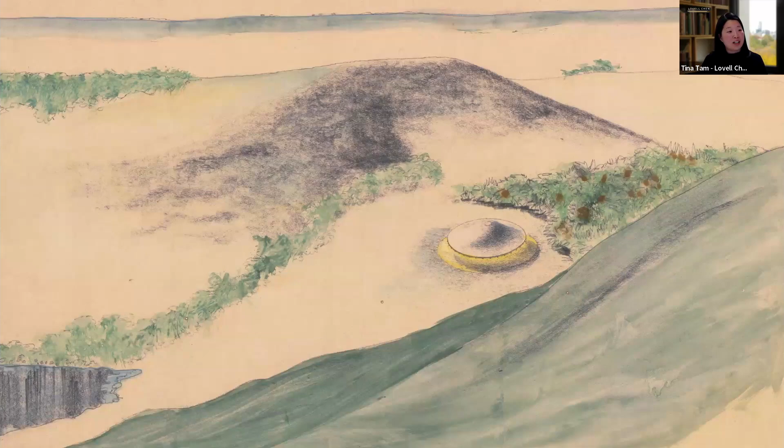So in our research with the conservation management plan, and through archives and information provided by the Robin Boyd expert panel, we had quite a lot of information to draw from in our design, which was really great. This is one of Robin Boyd's early concept sketches for the visitor centre, which show the building envisaged as a pure circular form with a roof that emulates the volcanic cones of the area.

The interior space was a continuous open volume for exhibitions, with a central model space at the heart to hold the terrain model of the reserve. At one point during the design, the requirement for supporting program, such as toilets and storage, sectioned off.

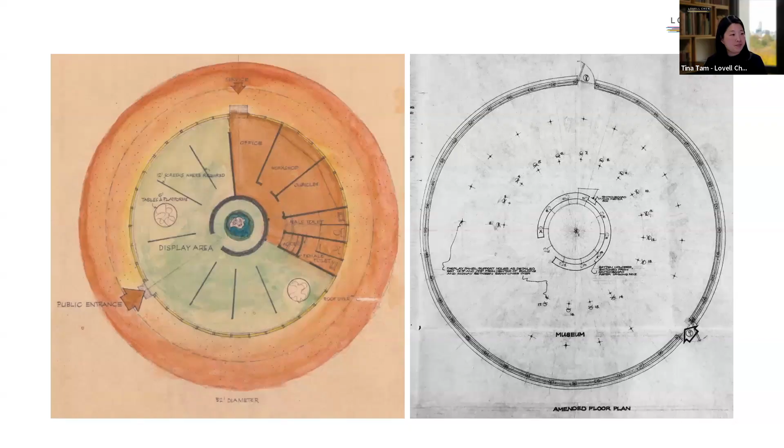Based on discussions with Robin Boyd, the amenities block was designed as a blank monolithic form by the Public Works Department and located at the periphery of the visitor centre. The two buildings were linked with a common construction material of local limestone sourced from the area.

So for the past decade before we started, the visitor centre has been a shop and a cafe, and the small ranger's office in the amenities block converted into a classroom. Our brief was to provide a base for EMAC for their return to being the stewards of the site, and they needed additional exhibition space and education space, which actually resulted in an overall increase in area that we didn't have.

The other challenge was that this brief conflicted with the funding agreement, which was originally based on demolition of the amenities block and its replacement with a standard toilet block and no buildings. And so this is where the support of the expert panel, Parks Victoria and EMAC became really important, because together we advocated for the retention and adaptation of the amenities block to continue its role as a supporting building in honour of the Public Works Department's initial gesture.

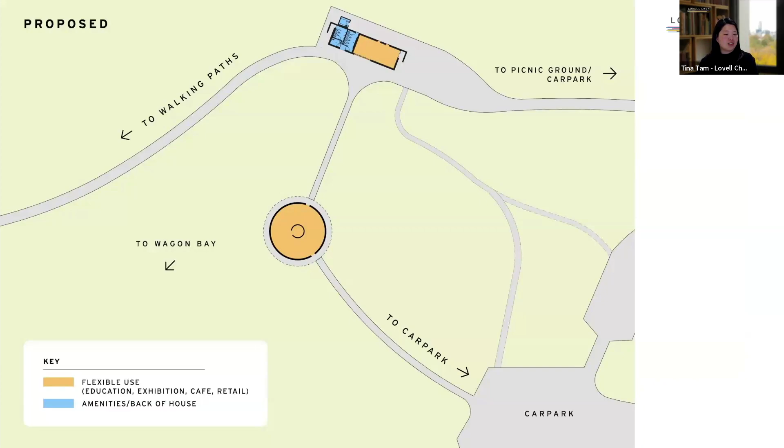And through a sleight of hand, the western side of the building was extended by 2 metres. The detailing of the new slot opening was discussed extensively with the builder and expert panel to make sure it was clear as an insertion and buildable with the soft, uneven limestone.

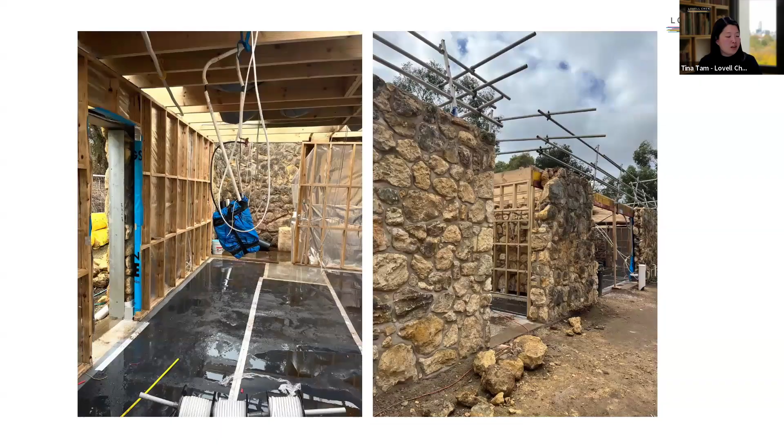We consolidated the bathrooms to one side and used every single millimetre, and this provided the additional space for learning on country. As part of the work, we also upgraded the building envelope with insulation to the walls and roof and new double glazed windows. And all stone from the internal walls was salvaged for reuse to the extension. So this is the completed extension and a before and after view from the visitor centre.

The next aspect of the project was really about the conservation. And in our restoration of the visitor centre, we're really acutely aware of our responsibility to maintain the clarity of this pure form, its innate connection to place and its patina of age. Our process was supported by rigorous research and effort and discussion with the expert panel. And in many instances, the decision to do nothing was a conscious one.

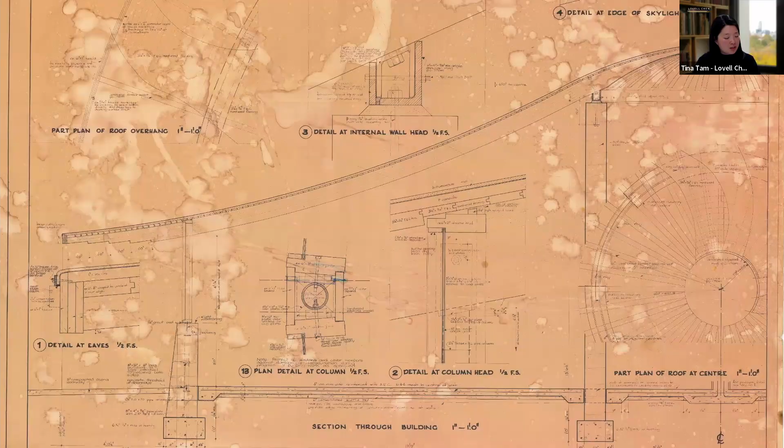The first step was to repair the roof. And our research, our access to the drawings helped us understand the composition of the roof with its spare construction of glulam beams, which is an emerging technology at the time, and timber lining boards as both ceiling lining and bracing. And these are some photos of the work being constructed and some excerpts of specifications that we found as well in the archives.

And to avoid damaging the brittle timber lining boards, we encapsulated the existing bituminous membrane with a new system. And following a prototyping process, we then cast in the scoria, ensuring it was like the original sourced from the place. And this is the result.

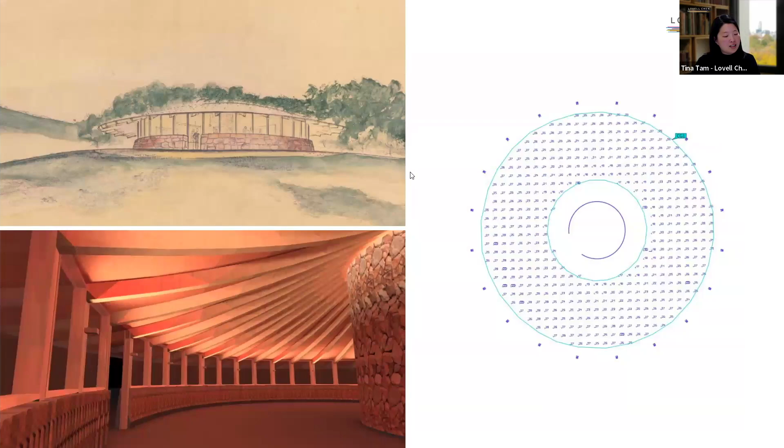The interior of the building has changed from its original honest representation of materials, as shown here, to a very different type of space. So our first move was to remove all of the fittings from the ceilings. We then developed a lighting scheme that uplit the ceiling in the spirit of Robin Boyd's original concept sketches. The lights are fixed to the outer columns and cabling threaded within the cavities.

We also stripped the paint from all of the glulam beams, ceiling linings and concrete floors using a non-toxic system to avoid runoff of polluted water into the environment. The slab was sealed with a penetrating sealer for protection while maintaining its patina. And we also tested the wiring within the floor boxes so that we could retain these and avoid cutting into the slab.

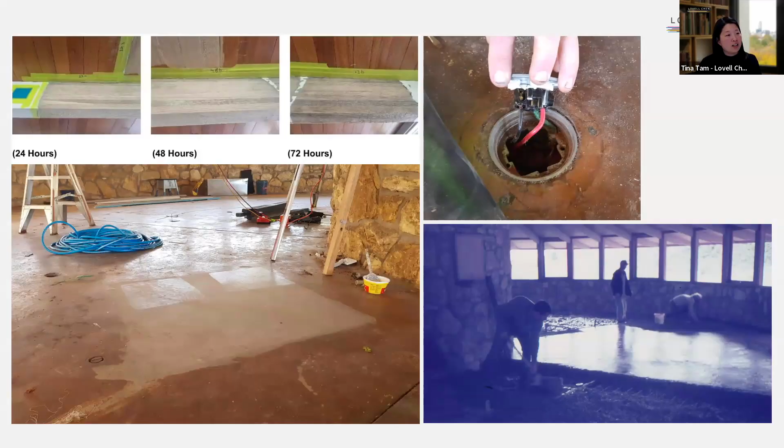We collected paint scrapes to understand the sequence of paint coatings. Interestingly, the discovery of a taupey green colour as the earliest coating conflicted with the specification written by Robin Boyd, which called up gloss white. And it seems like Robin Boyd had simply changed his mind along the way and used decking stain in the end.

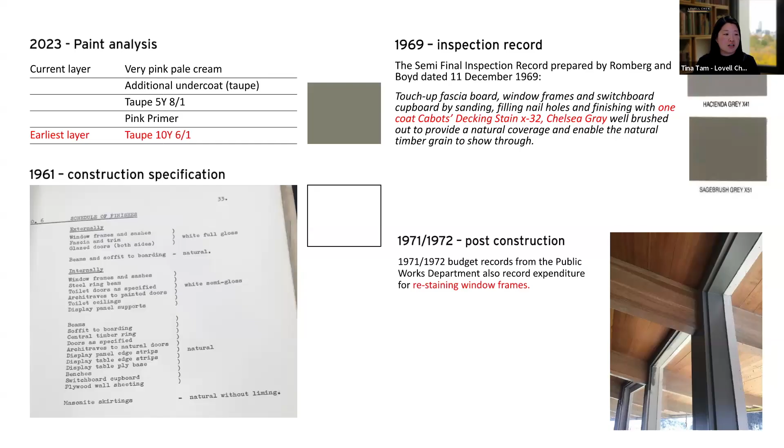So given the very condition of the timber work and the exposed environment, a decision was made to paint the timber in a colour similar to the decking stain, rather than reinstating the original finish, so we could hold on to as much material as we could. And there's some photos of the completed interior.

And the last aspect of this project is really about values and significance. Because of all of the stories that we learned along the way, it was really an important exercise for us to rethink how we assess significance. Without the protection of an individual heritage listing, the amenities block was originally slated for demolition. However, we demonstrated the value of this building based on its relationship as a support building to the visitor centre, its embodiment of community support, its suitability as a base for EMAC, and its embodied energy.

With the structure comprising 77% of the building's embodied energy, the retention of the amenities block is a demonstration that reuse of buildings, whether heritage listed or not, should be the first point of call and an urgent solution to climate change. And the last point is the project's central tenet of reinforcing EMAC's presence on country. The eel trap is significant for EMAC as their source of food and identity. We needed to find a meaningful place for this gesture.

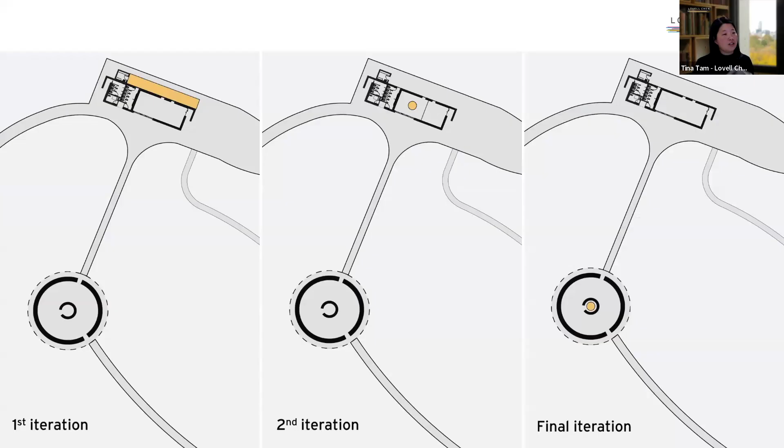Throughout the design process, the eel trap was proposed in various locations, but finally settled in the central model space of the visitor centre, which is the symbolic part of the place. We've given this space over to the eel trap to acknowledge change and EMAC's continued presence on site. And the eel trap has been commissioned and it's being made by an Aboriginal artist.

So to conclude, in our role as architect, conservation specialist and historian, we have honoured the various groups that have cared for this place. And we really think that the consensus has created an infinitely richer outcome.

Thank you, Tina. And then I will just jump straight into the Philip Smith Centre. Yes, please. This one's a bit shorter. So the Philip Smith Centre is located on a campus called the Domain campus just outside the CBD of Hobart. And again, in our role here, we were the heritage consultant as well as the architect.

So the Philip Smith Centre is located on the Domain campus, as I just said. The Domain campus is important because it's the founding campus of UTAS. And the building itself was designed by the Public Works Department and remodeled by Rudolf Koch and constructed in 1909 and 1910. And there were probably just a few things I wanted to talk about with our design process today. The first thing was really our intent to capture the building's spirit.

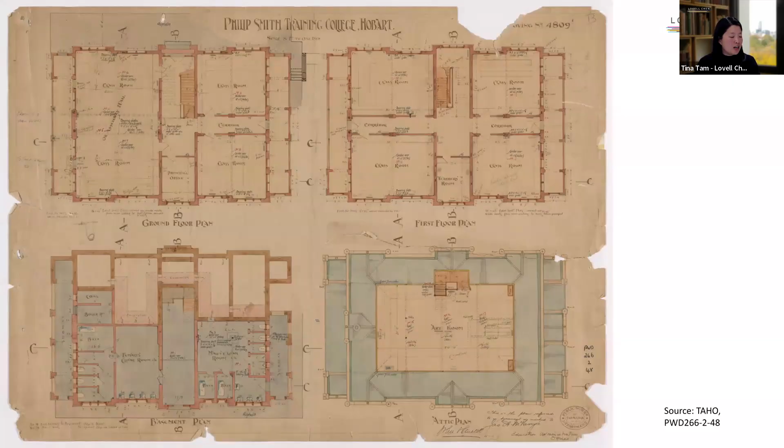The building was designed to progressivist principles, and this was grounded in a belief that education should stimulate psychological and social well-being in students, and it promoted a hands-on or experiential approach to learning. This was translated into a very clear plan of generous teaching spaces with large windows for natural light, large double height verandas on each end, providing fresh air. The interior scheme had minimal ornament with dust-resistant finishes such as painted hard plaster and pressed metal ceilings.

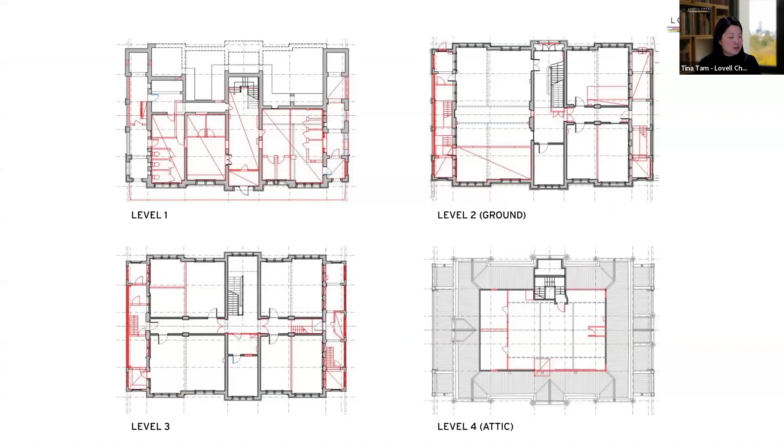So our first step was to peel back the later interventions to restore the progressivist design principles of well-being, fresh air, and natural light. The original plan of the classrooms was restored to provide teaching spaces, and the art room in the attic adapted to provide an office or teaching space, self-sufficient with its own amenities. The later infills to the verandas were also removed to provide breakout spaces.

And these are some of the before and after photos. This is before and after. Before up in the attic and after.

The second part of our approach for this project was designing with nuance and avoiding harm. We consider the most important part of our design to be what we didn't build here. And that was important for reducing the carbon, the embodied carbon, but also for minimizing harm to the building. The requirements to bring buildings up to compliance with current code can be extremely invasive, risking damage to the fabric and loss of architectural intent. So together with our team of engineers, we undertook a detailed audit of the existing condition that ultimately supported the retention of the existing structures and services.

To reduce the operational energy, we started with a fabric-first approach. This building is unique for its large windows and still had interiors which were very intact. The condition limited our ability to retrofit insulation externally, internally, or within the brick walls. Instead, we targeted the areas where works were already occurring. We upgraded the roof with additional insulation, airtightness sealing, and replaced the damaged clerestory windows with new high-performance versions. And as part of the refurbishment of the double-hung windows, we installed draft seals.

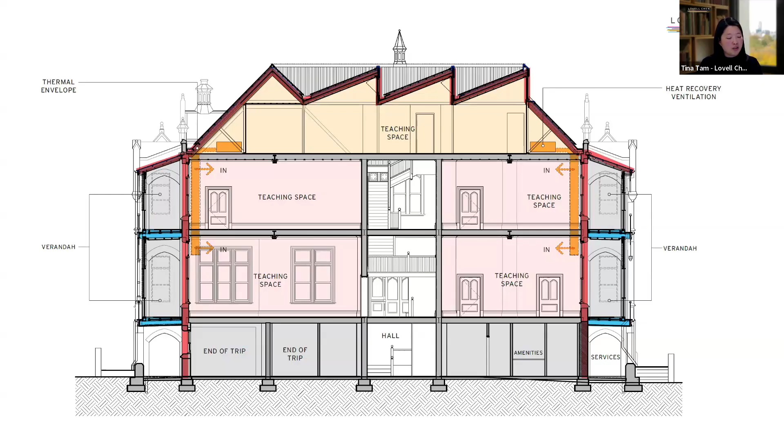To provide fresh air, because we were designing this during COVID, and this was particularly topical, we drew inspiration from the building's passive ventilation tubes. We then undertook a careful comfort analysis, which confirmed the fact that most of the building only required heating and that the attic was the only space with temperature fluctuations that justified active cooling. The analysis and building fabric upgrades significantly reduced the heating and cooling demand and ultimately allowed us to incorporate a very low-tech mechanical solution of electric heating panels and split air conditioning units into a building with pressed metal ceilings and no ceiling cavities.

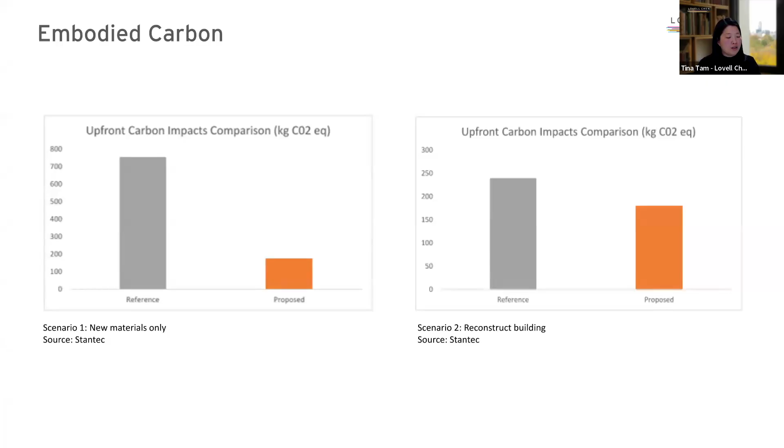And the culmination of these careful moves is that we were able to achieve a reduction in upfront carbon of 76.7% when comparing new materials only and 26.79% compared to a reference case where a new structure was built.

And lastly, this project is about a commitment to the community. It's been an important project in demonstrating the UTAS commitment to give back, because the building has had quite a rich social history and is very much cherished by both the local community and people around the city. Before the university reacquired the building in 2020, it had actually been owned by the Hobart Discovery Incorporation, which was an organisation formed by local residents to preserve and make the building available for community use.

So despite this being a heritage building, the other aspect that we were keen to deliver on was inclusivity. We were committed to exceeding minimum industry standards for inclusivity and universal design. So through careful interventions, we were able to make the whole building fully accessible by including new entrance ramps and lifts discreetly located within the veranda. And to avoid the lift overrun projecting above the roofline, we tucked in a second transfer lift into the attic. All the classroom spaces were fitted with remote learning technology to provide remote access for students with differing backgrounds across the state.

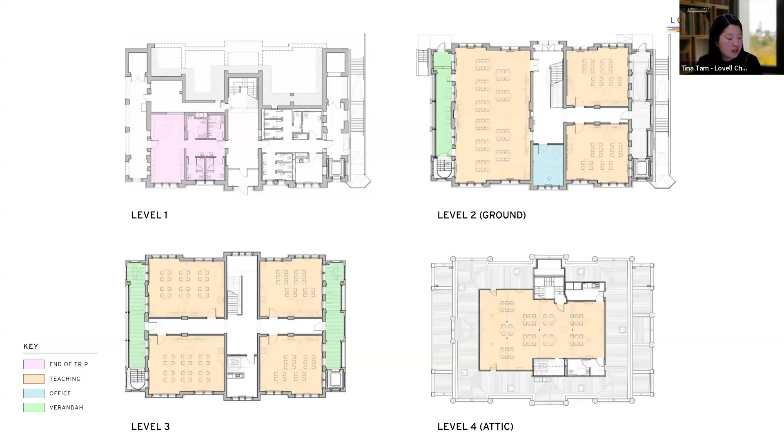And the final part is the conservation. So we repaired and braced all of the stonework walls for the facades. The works are carefully scoped to achieve a balance between holding on to as much fabric as possible and considering the lifespan of the material to last another 50 years before another significant upgrade would be done. The cast iron downpipes were retained and reset, and where possible, sandstone lintels repaired in situ.

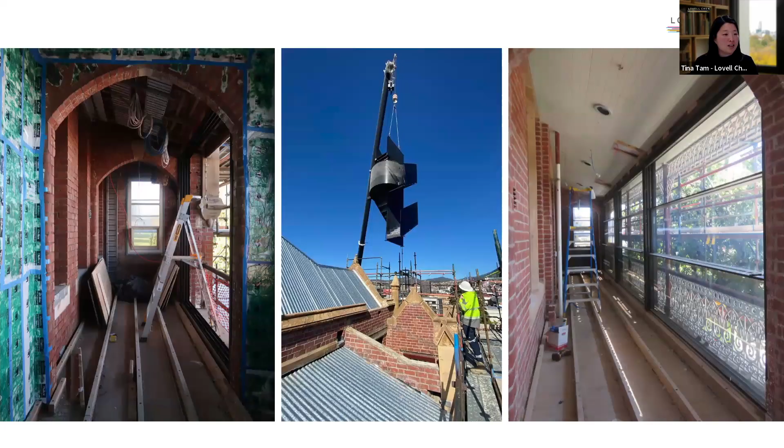We conducted paint analysis to confirm the paint scheme, and the verandas were restored through paint removal. The cast iron lacework was restored, and as a new intervention, we introduced a new set of guillotine windows behind them to allow for weather conditions. I think all of this together are really the moves that we have made to make the building relevant. And I will finish at that.

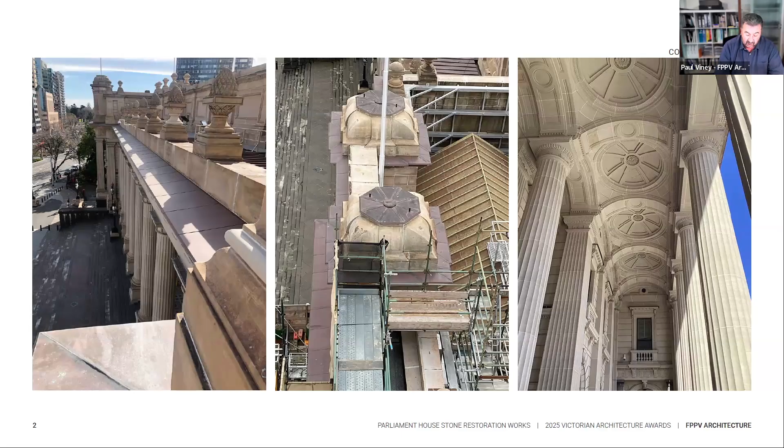In 2005, there was a Department of Parliamentary Services created, which provided the opportunity for this project to proceed. In 2006, there was a large section of cornerstone that actually fell off the building. And if it had fallen 20 minutes earlier, it would likely have hit a minister doing a press conference. So there was a sudden urgency to address what was going on.

There was a lot of publicity at the time in terms of it was quite an important building, but it had been let go to rack and ruin. There was what was known as the Chook House out the back where the MPs were stationed. So the idea was to try and get this thing back into a state of quality repair.

But in order to do that, there was a funding process that was required, and the department engaged us to undertake a feasibility study to relocate Parliament House to the southern end of Spring Street over the railway yards, to look at the cost benefit analysis of upgrading the current building versus building a new building. The new build was going to cost 2.4 billion at that stage. So the Treasury decided they would spend the money on upgrading the building.

And ultimately there was an ongoing funding basis, which is available on an annual basis, which is why it took the 18 years to do the project, because it was a staged process on both funding and also works. So we were engaged in 2006 to undertake an annual stonework audit, where we were required on a knuckle boom device to go around and touch every stone to test its current rigidity and safety. What we found was that many of the repairs that had been done in the 90s were actually the root cause of the current problems, because water ingress problems had never been solved.

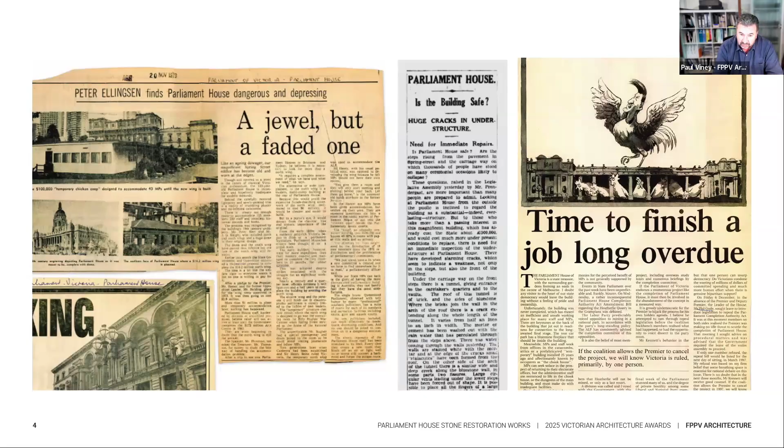So we had large sections of stone that were falling away. You can see the sections of the dentils that were falling away, sections of the stone above that were coming apart. So there were really significant problems with the building, and the Department of Parliamentary Services decided that it needed a much more holistic approach to do these works, and we were actually given a notional 50-year repair target, so that there should be no further works required within the next 50 years.

So it was a bit more than traditionally were done. We didn't do indent repairs or concrete repairs as traditionally done. We actually put block repairs in throughout the process. It had a more holistic approach to traditional stonework restoration, because we had to make sure we had no water ingress. We had to address structural movement, cleaning and repointing of all facades, dismantling and resetting of parapets and chimneys,

replacing entire roofs, gutters, substrates and rainwater goods, restoring windows, doors, replacing drumming render, removing redundant services and fixings, upgrading existing services, and full block replacements. So some of the block sizes we put in were, when we bought the blocks, 1.4 bedding depth and up to 1.8 by 2.4 metres long in the stone we bought. O'Connor and Sons were the stonemasons, and they undertook all stages of the project.

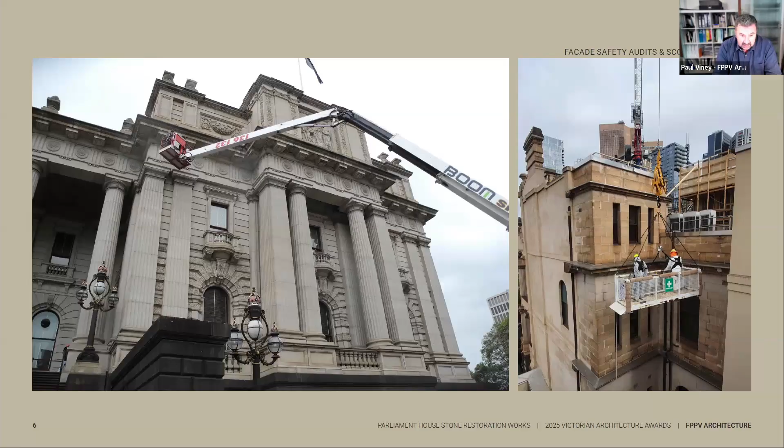In sourcing the sandstone, we faced similar challenges to the original builders. The original stone for the library wing at the rear of the building came from a quarry near Bacchus Marsh called the Darley Quarry, which has been closed for decades. And even at the time of construction, Kerr considered this an inferior stone, but it was chosen because of its cost at that point in time. The stone had many replacements over the years. You can see some of the damage there.

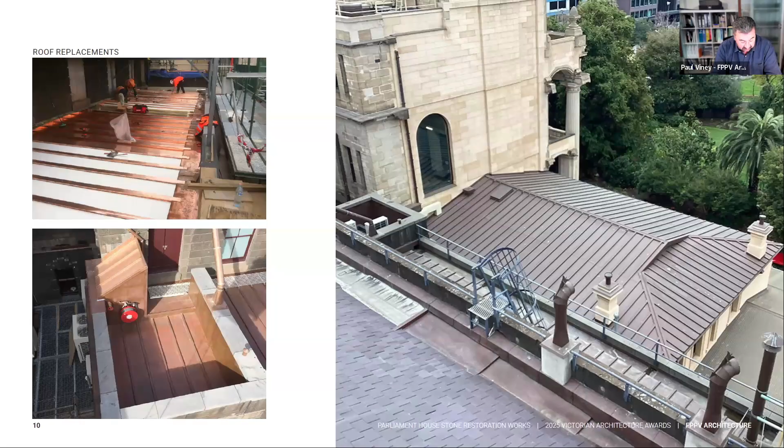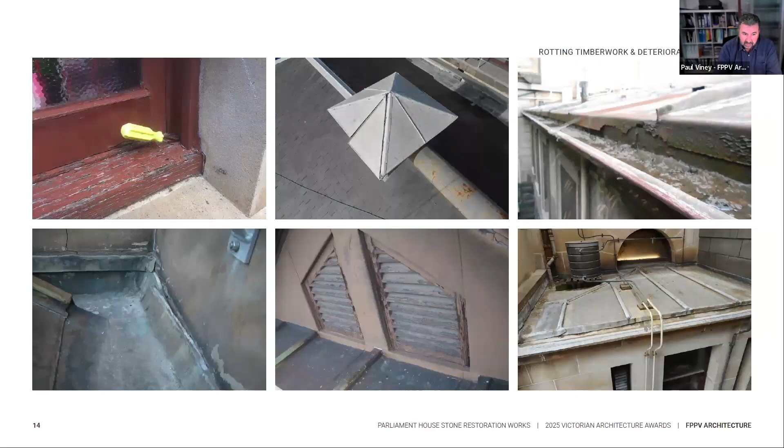So the stone was found to have the closest match in properties, texture and colour for the replacement stone for stages 2 to 5, which was the back of the building around the library areas. But the rest of the building had been built from Stawell stone, from the Heatherlie quarry at the Mount Difficult range of the Grampians. Now that had ceased to operate in the 40s.

It had been used for a period after that for historic restoration on blocks previously available or cut, but they had been exhausted some time ago, and there had been some inappropriate practice by a contractor who had blasted the face of the quarry and left it in a poor state, and the First Nations decided that there would be no further use of it, and it was covered by native title claims. So we went through a similar exercise of identification of stone and testing for the remaining stages, and the remaining stone came from Poles Creek quarry in Gosford, New South Wales.

The only problem was that this creek also supplied a product called Guinea gold. And what happened was once the stone was taken out of the ground, it would sit for several weeks, but it could actually change colour completely from the buff colour that we required to a bright orange gold colour. And it was only after you'd taken it out of the ground and left it for the quarry sap to dry that the colour became apparent.

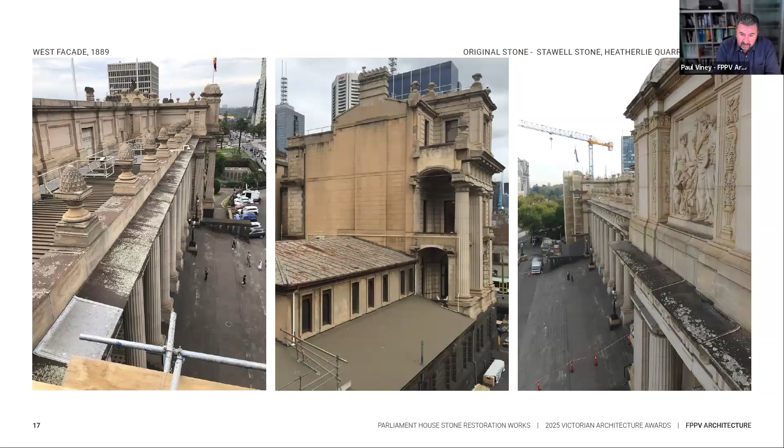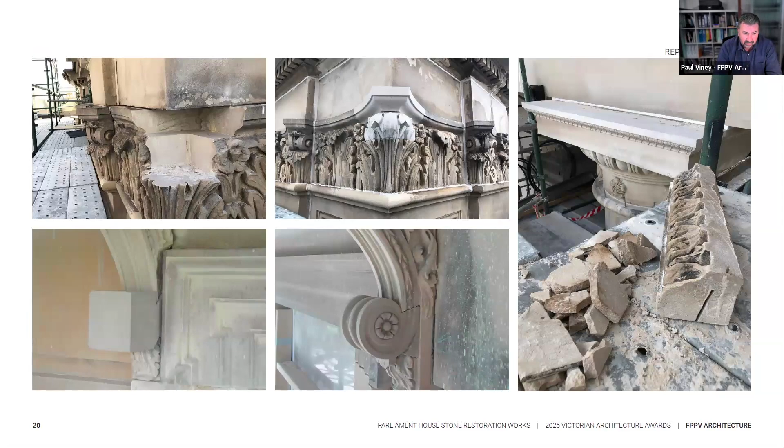When we were originally proposed to do the work, we thought we were replacing large sections of the cornice stone, but we found that it actually was full depth. It went from the actual inner wall to the outer corners of the building in one complete stone. So techniques had to be developed to enable that stone to be cut and then large sections to be inserted into the cornice itself. So virtually the whole of the cornice stone around the whole building has been replaced. You can see the details there of how the new indent repair was done over the original cornice stone.

The project employed a mix of technologies and traditional craftsmanship. Stonemasons used multi-axis CNC technology to mill stone to appropriate sizes before delivery, with all intricate carving and final dressing completed by hand using century-old techniques. Early in the piece, the issue of silica was identified and measures put in place to ensure the safety of all occupants and stone workers. These included establishing vacuuming stations with HEPA filters to enable the site to be cleaned morning and evening. Special cutting booths were established to reduce noise to adjacent occupants and reduce dust.

One of the really critical things was this was all done whilst the building was being used and occupied. So on sitting days we couldn't work on the site at all. We had to work around the sitting day calendar, which was a challenging thing for all parties. One of the key aspirations of the project was the transfer of specialist heritage skills to the next generation. A number of apprentices that started on the project were employed to work for over 15 years on the project. So we actually employed and educated a range of stonemasons during the course of this project.

Copper flashings were introduced to cornices and parapets to prevent water ingress. This is the CNC machine, some of the windows being done. So that's the copper flashings that were introduced. New details for developing fixing of the copper flashing gutters and flashings based on research and traditional techniques.

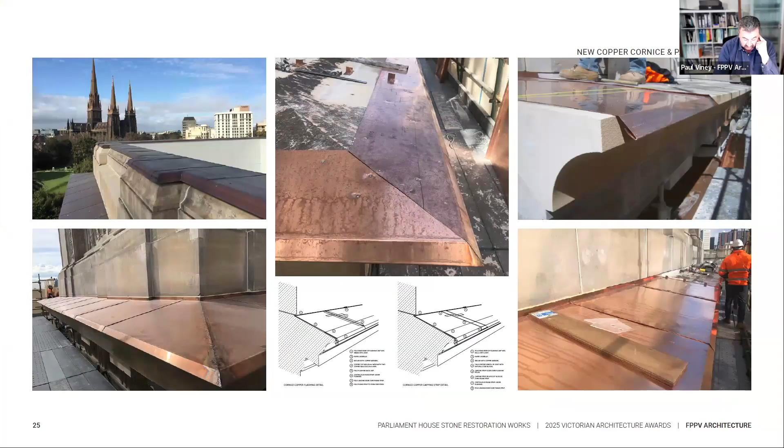So basically that's the extent of the project. At the end of the day, a lot of people looked at it and said, well, what have you actually done? It looks like it originally did, which is, we think, the greatest compliment that could be given, that we've left it in a condition that will last hopefully the next 50 years, and it's back to its shining best. Just quickly, you get a couple of ideas of some of the work that's been done.

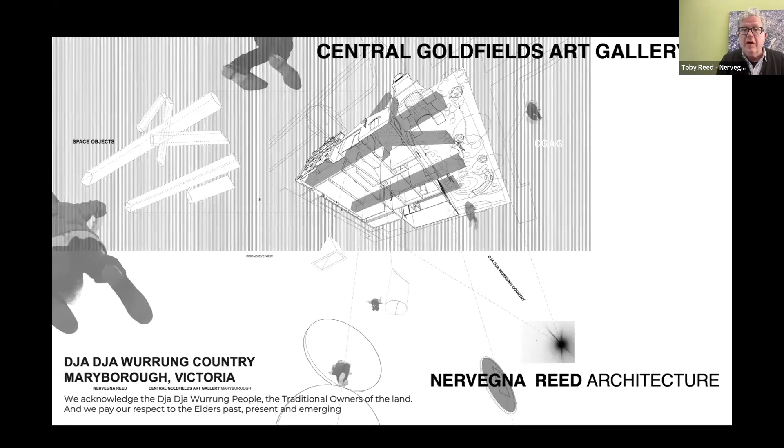Maryborough has sort of got a big axis, and at one end is this enormous train station. It's a Goldfield sort of town, and at the other end is this, which is the old town hall and the fire station, which had been used as a fairly rundown art gallery, and so we were commissioned or won the tender to convert it. So this is the state we found it in.

It was fairly dilapidated. It was a real mess inside, like there were walls everywhere. It was originally built in 1861. Then the tower, which is really beautiful, was built in 1891. And there were lots of interventions since, including putting suspended ceilings in the main space and all sorts of things. And then there's this back area which was used for parking.

And so part of the original grant application was to rejuvenate the art gallery into a contemporary space which could be used, and they could borrow artworks from around the world or other art galleries, and also to do an Indigenous interpretive garden, which would also be like a sculpture garden in this car park. So these are some of the interiors. You can see every room was pretty much at a different level, so there was no accessibility at all.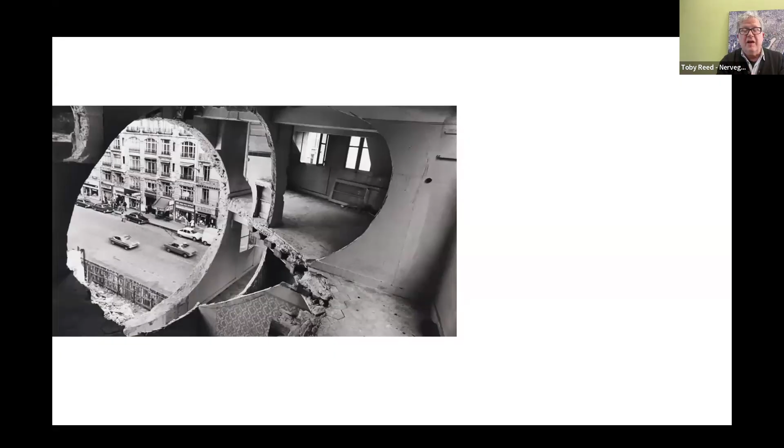And that was part of the brief, in that we had to include Djaara histories and Djaara narratives and allow for not just a reconstruction of the Victorian narrative, I suppose. So obviously Gordon Matta-Clark came from the Duchamp sensibility of treating buildings as ready-mades and then doing actions to them, in this case, cutting out. And we also thought that even traditional architecture is very much like an exquisite corpse, a bit like the Duchamp stool, where you've got Bramante, then Michelangelo, then Giacomo della Porta and Bernini constantly adding to each other's works.

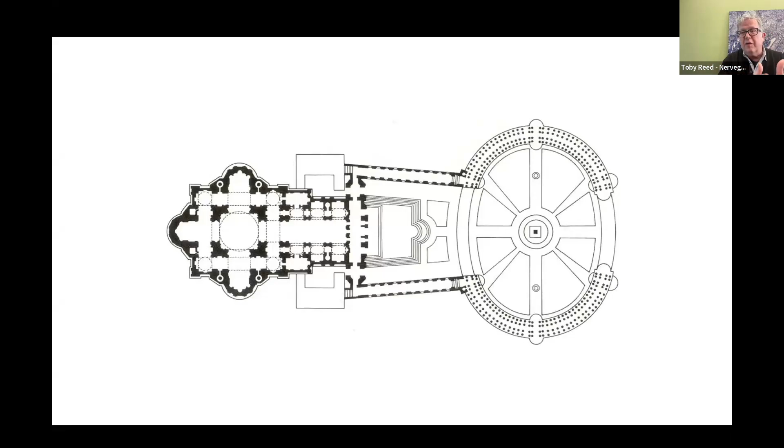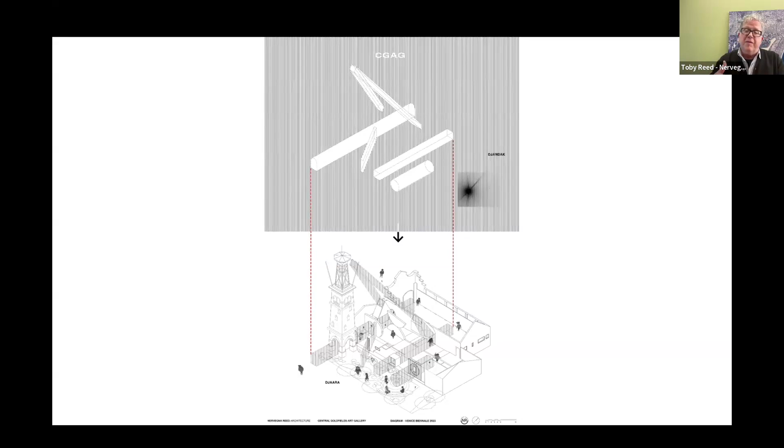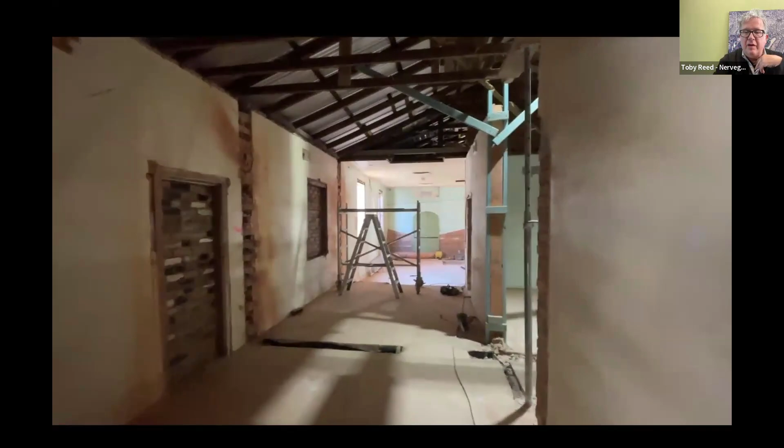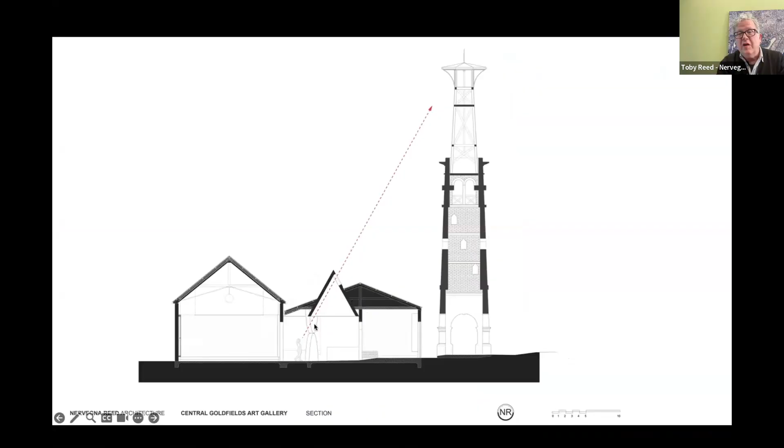So this is one skylight we cut out in the entry hall, which sort of aims at, when you walk around and you look up and you get this kind of cinematic glimpse of the top of the tower. So that's it there. You can see it's like a triangle, dropping into the ceiling. And then you stand over here and you see the tower.

And then underneath the shape of the tower, we then cut through the building, okay? So these arches in a way look like they were always there, but they weren't. But they're just like a sort of, I suppose, a cutting tool or something from the original architecture.

Oh, and by the way, this brick wall here is the oldest brick wall in the building. So we sort of cut away the plasterboard, which was like I suppose the modern white cube gallery, cut away to reveal the history of the building.

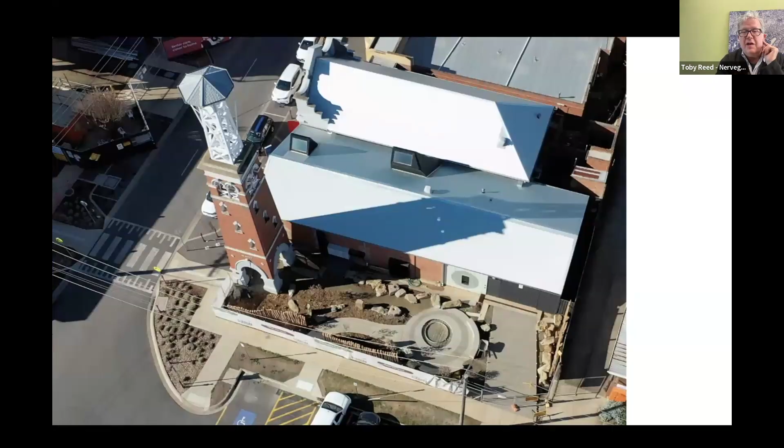So you can see that's the garden finished. These are the skylights that aim up at the tower. So we're trying to sort of preserve or sort of show the Victorian architecture in a way that the Victorians probably wouldn't have ever done it themselves, I suppose. So opening up new ways of experiencing the 19th century reality.

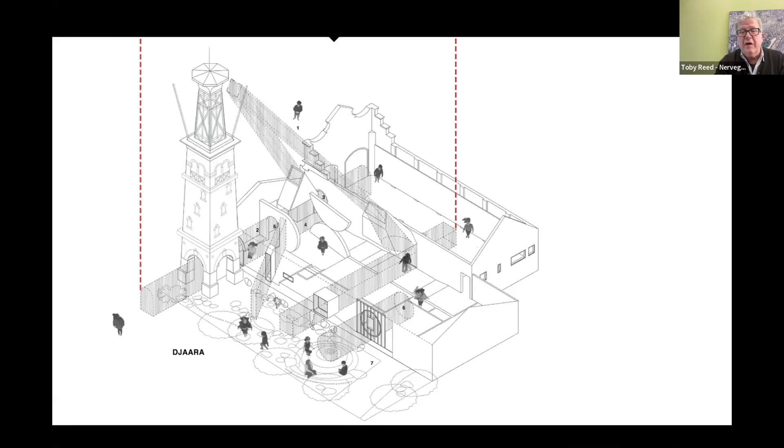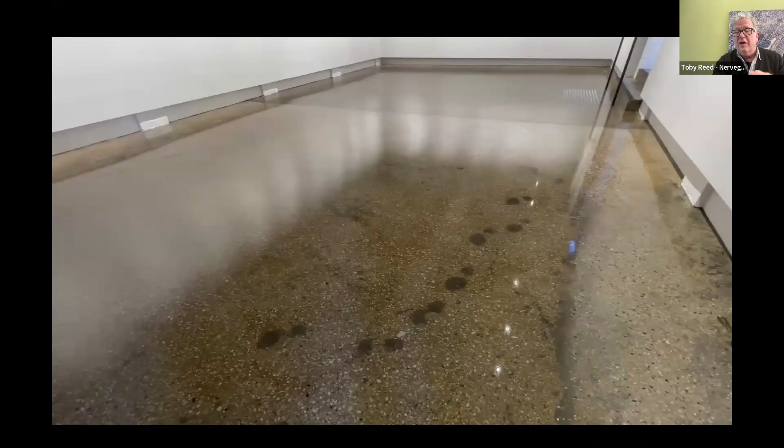This is where some demolition happened and we needed columns. So we created this sort of column, which also stops people falling off the ramp. And as we took away all the layers of carpet that were there, all this floor was revealed, because all of this was hidden previously, and there were walls all over this room. And we found things like the original footprints of the people who had laid the slabs many years ago. And you can see here where we've demolished walls, we've got a different color concrete in there, so you can kind of get a sense of the plan of how it's mutated.

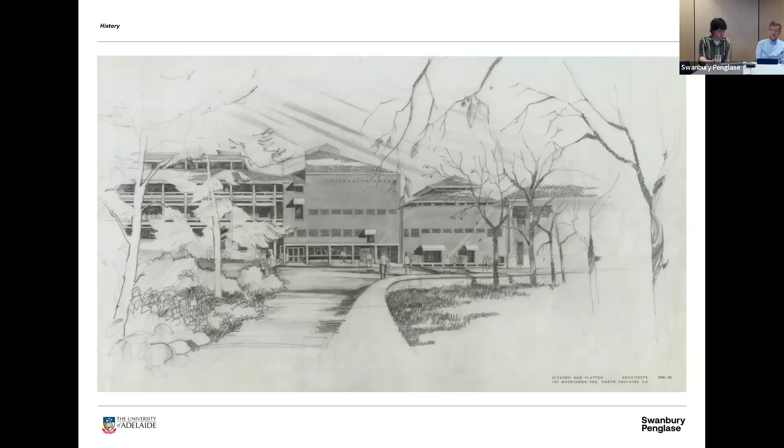However, due to various decisions associated with the university, more recently, the Union Building actually lost its people. The university wanted to rectify the situation, but they felt restricted by its heritage listing. Our involvement actually originally commenced preparing a revision of the conservation management plan for the building, which helped us to understand its significance and identify opportunities that would not detract from its heritage values.

Despite its sad state, Union House had, however, proven itself to be resilient and durable. A series of guiding principles informed the response, recognising its importance while fostering its transformation. Throughout this process, we've been very mindful of every decision we make. And throughout, our intention has been to provide an enduring contribution worthy of the place.

The original palette of materials, which includes face brick, natural coloured concrete, both off form and in situ, pre-finished timber, terracotta roof tiles, quarry floor tiles, and compressed straw ceiling panels, was respected and conserved, and complemented by new elements that distinguish old from new while remaining subservient to the architectural context.

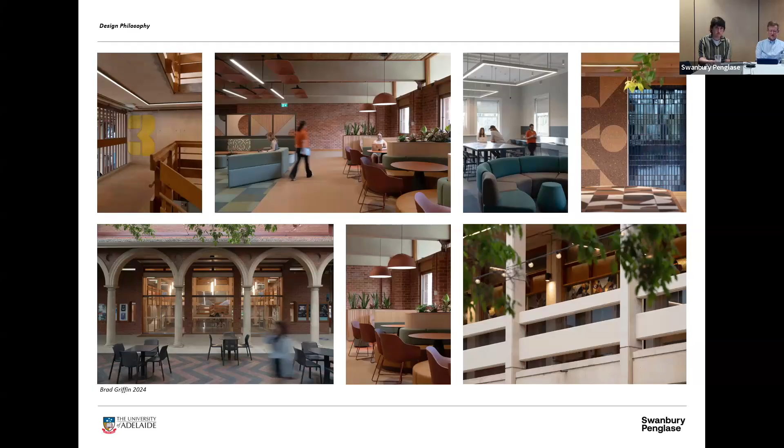The works have bridged all 7 levels of the complex, but the major changes were mainly focused on 3 levels. Level 2 improved connection to the surrounding lower campus and the wider public realm, activated through the creation of new performance spaces, the relocation of the well-known Unibar to this level and the reimagining of the cloister.

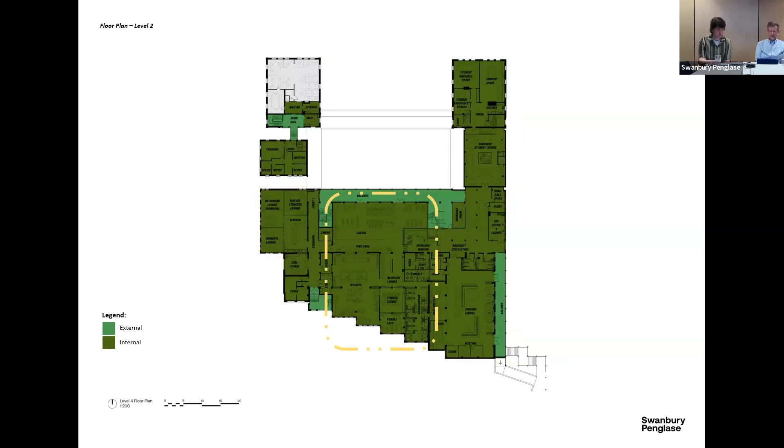Level 4 included reinforcing connections to the upper campus with a diverse range of student-focused spaces, including a relocation of the fitness hub. Level 5 provides the university community with spaces to gather, meet and socialise in a new restaurant and suite of function rooms.

Given the building had a complex patchwork of slab construction, an early soft demolition phase allowed for desktop studies to be reviewed on site. Through these investigations, some structural deficiencies were found and new carbon fibre plates were introduced to meet current live loading requirements. All these interventions were concealed not to detract from the detail and volume of spaces. A seismic review demonstrated that the building performed surprisingly well, but some additional restraint was needed.

The visually disruptive later balustrade infills between the original precast balustrade rails were replaced and tested through prototyping, and what we see here is the result from the exterior cloister view and then also down the balcony. Particularly challenging was the replacement of all services in a building with few opportunities for concealment.

Completed in 2019 was the redevelopment of the cloisters, creating a multifunctional space used for campus and community events. This was supported by the relocation of the Unibar, strengthening its reputation as a live music venue in Adelaide. Additionally, refurbishment of the former refectories created performance spaces. This stage allowed for greater use opportunities to the lower areas of the complex.

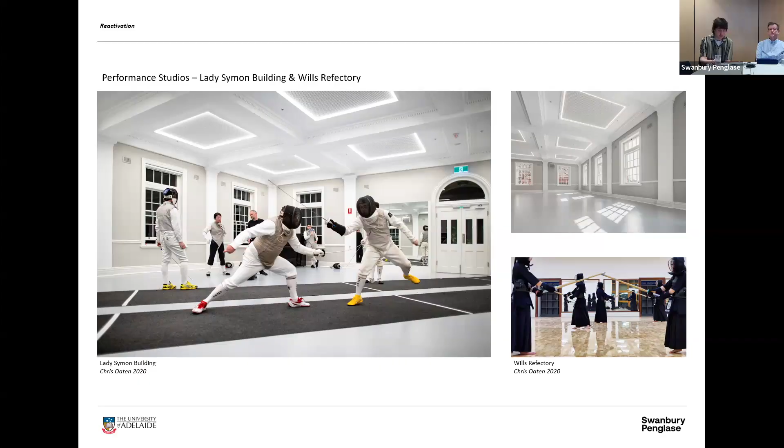The reimagining of the former Union Bookshop into student spaces reversed unsympathetic changes that broke up its sequence of vertical spaces and opened it to the cloister. A range of other student spaces have been added, servicing a diverse range of student groups that previously might not have had a hub of their own. To allow the redevelopment of level 5, the fitness hub was given a new home on level 4, resulting in a unique gym offering.

A key component has been the integration of a restaurant into the precinct. Taikundi, the Kaurna word meaning join, unite, partner together, is the culmination of stakeholder engagement with the broader university community. As a place of collaboration between academic staff, students, and the broader Adelaide community, a range of function suites have been created. These cater for a broad range of function typologies and sizes closely relating to the scale and feel of each individual space.

Throughout the project, circulation patterns by the external balconies were restored, and the original colour wayfinding strategy was renewed through the cast numerals to the stairwells and finishes within the circulation zones of the building.

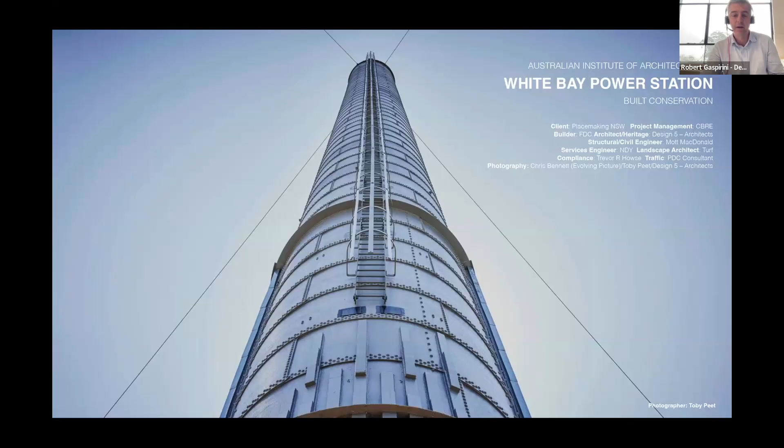Well, thank you for the opportunity to present. This is the White Bay Power Station, and thank you for the introduction. Our client was Placemaking New South Wales, and our contact is an apology today. She can't be here. She's also an architect, but there were many other people from Placemaking also involved in the site. First of all, I'd like to acknowledge the land of the Gadigal, and I pay respects to the elders past and present. This is the land on which the White Bay Power Station is situated.

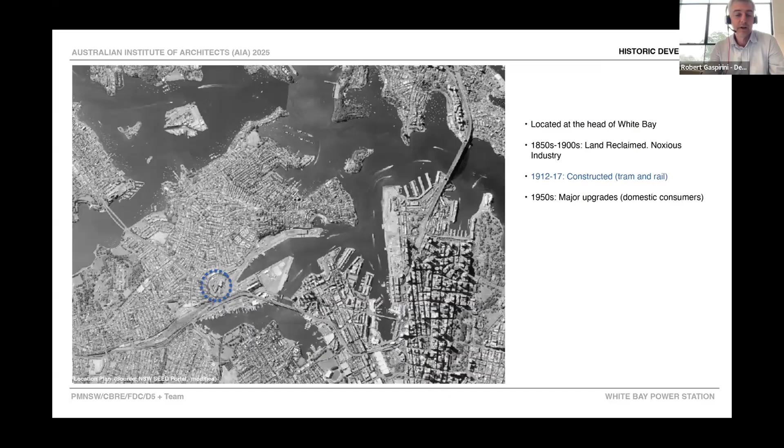"It should be knocked down." Now, this was our premier at the time, Perrottet's declaration in 2020. It's not a great start, but we knew we had something to prove. The site is located at the head of White Bay. We're in Sydney. The White Bay Power Station was built in 1917 to supply electricity to the rail and tram networks, and was modified in the 1950s to serve domestic consumers. It was decommissioned in the 1980s and listed on the State Heritage Register in 1999. It is now part of the Bays West renewal, with the future metro station next door, which will connect Sydney to Parramatta, currently being built.

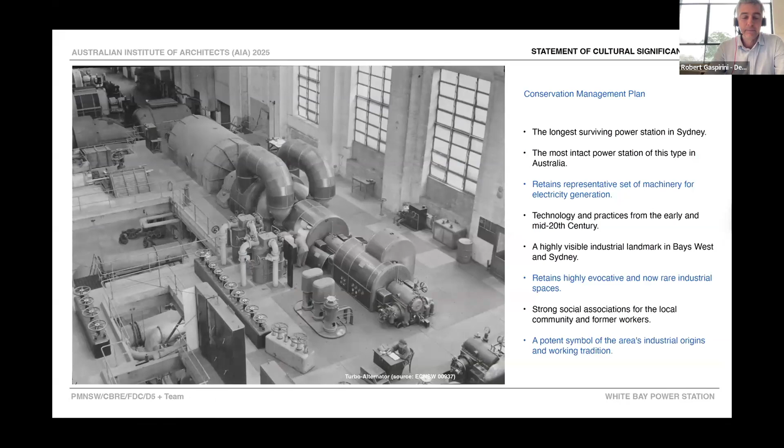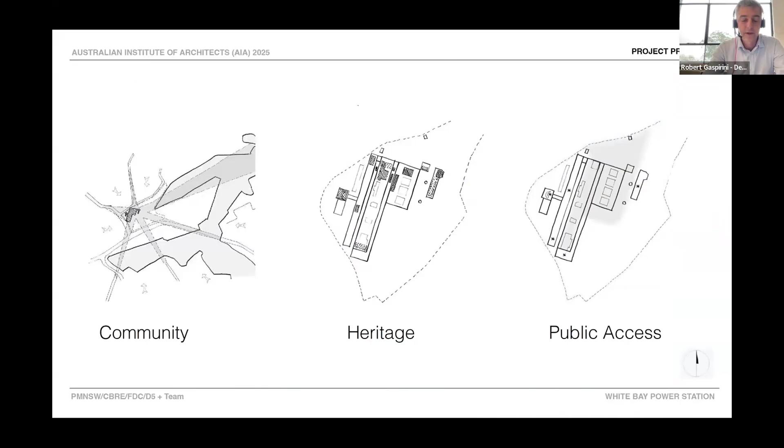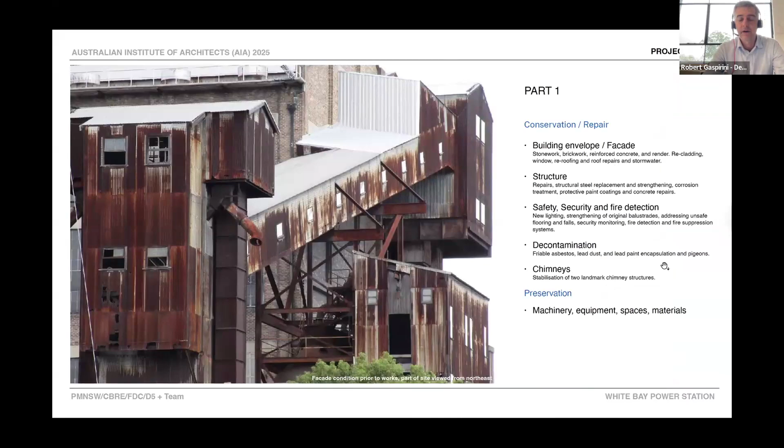So our project was driven by three principles as detailed in the CMP. The first being community, that is to engage with its surroundings and maintain landmark status. The second, heritage, guided by the Burra Charter and the CMP. And the third, public access that is meaningful and equitable. Based on these principles, our project involved two parts. The first being conservation, repair, and preservation. I won't go through all of these, but I've listed some of the repairs on the right-hand side. And the second part was implementing community activation through public access, and that included stairs, ramps, BCA upgrades, services, administration, external landscape, and site security.

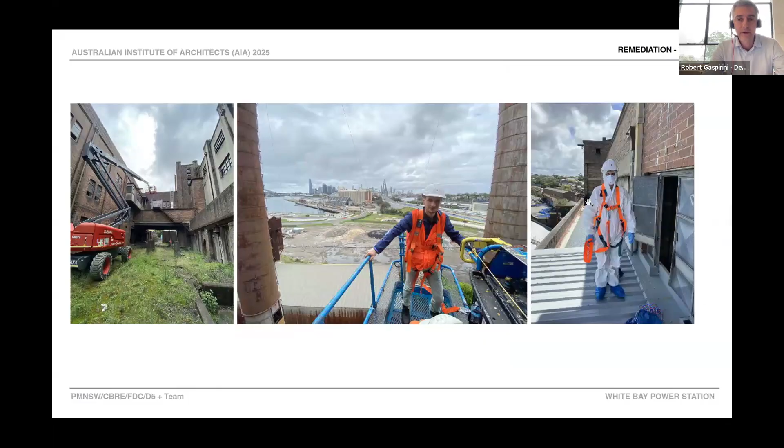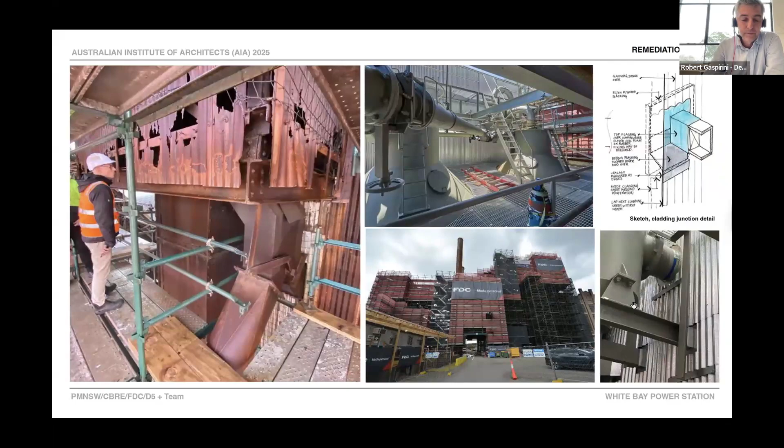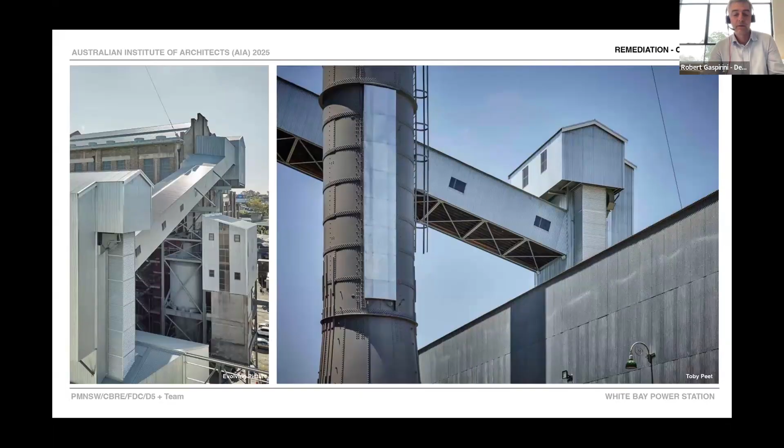We didn't date stamp, but the details differ on close inspection. The cladding is Z600 galvanized sheets in 3-meter lengths. Our methods were honest. The replacement will rust and patina with age, as did the original.

The roofs make up a vast area, and prolonged leaking had caused enormous internal damage. An invisible intervention was adapting the roofs to meet the current 1 in 100-year rainfall, which they weren't originally designed for.

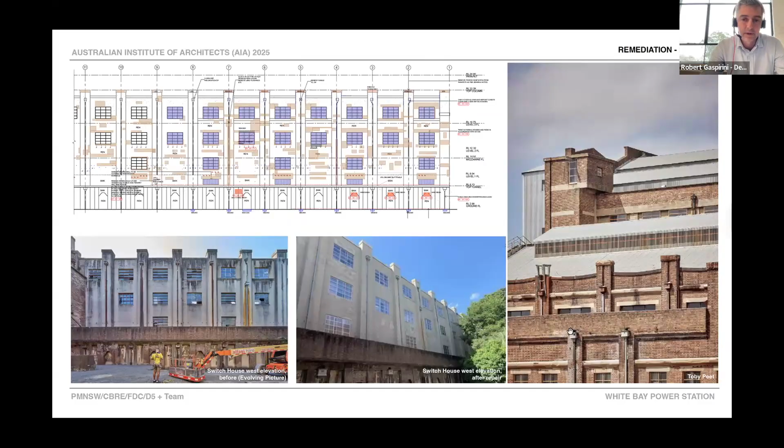We had many facade types, each requiring technical knowledge to specify repairs. Repairs was a process of investigation and prototyping. Let's just show some rendering, brickwork. We had, as you saw before, galvanized steel.

The basement of the coal handling shed was a unique issue. It was where the coal was first delivered to the site and contains an 8-meter deep basement housing elevators, conveyors, and these were completely flooded. Here we pumped, cleaned, treated rust, strengthened steel, and installed services. Our interventions are almost invisible.

Close to 80 meters tall, the chimneys are a local landmark. They present a unique set of problems and opportunities. The external ladders had failed and the Sydney Metro were boring a tunnel 12 metres directly below them.

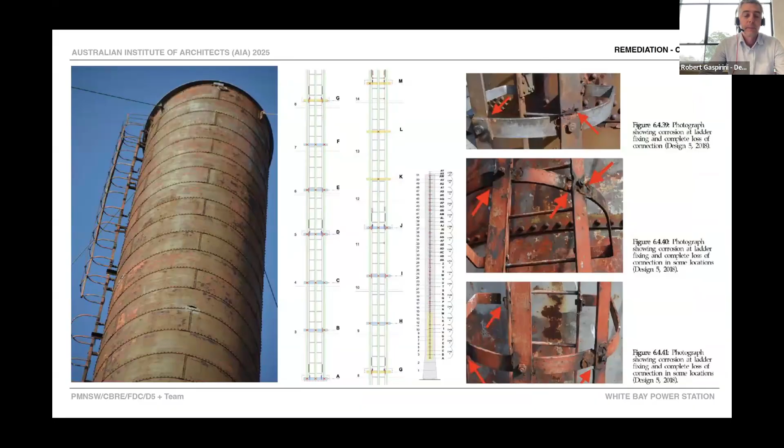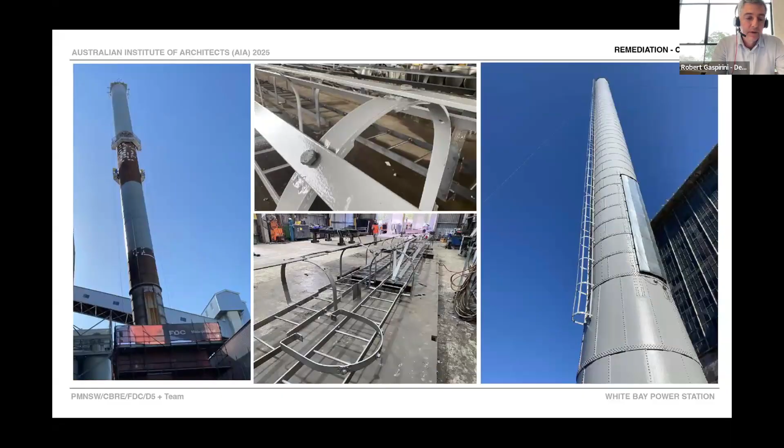The entire chimney was strengthened and protective coatings applied in a colour to match the original. The chimney ladders were removed and repaired. New and old were differentiated in detail.

Part of the decontamination scope was to encapsulate lead paint. We approximate about 60,000 square metres of walls and 30,000 linear metres of steel. Colour matching of each of the spaces was an ongoing role, and the colour was tested thoroughly before application.

And decontamination also included the replacement of asbestos sheets and the removal of pigeons and their remains. We had lead dust and several other things.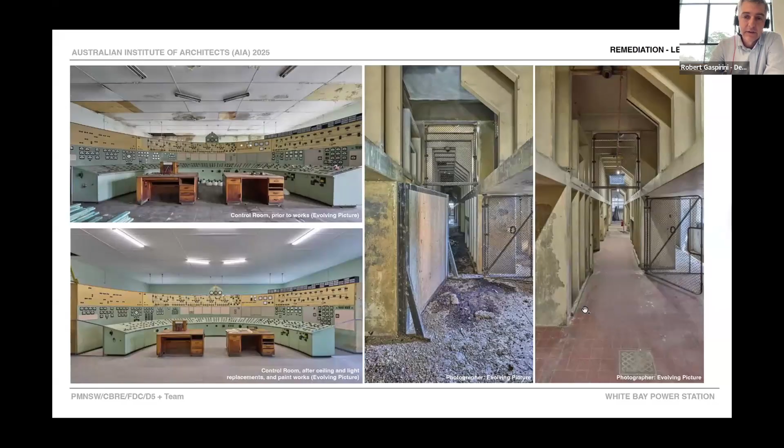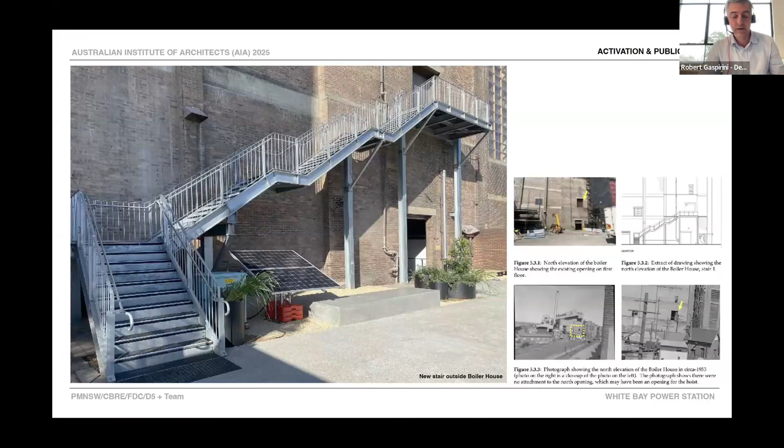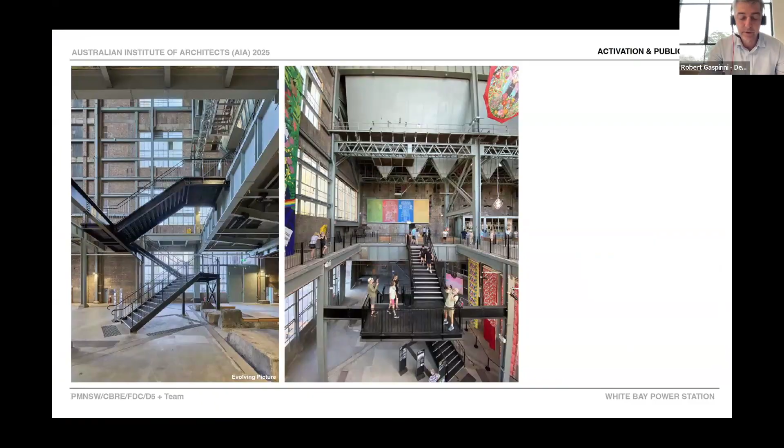New elements are not only functional, but also allow users to pause and appreciate each space from a unique perspective. We used existing voids. Each insertion needed to belong. We had to fit a multi-purpose lift in a location that would service all levels and cause the least impact.

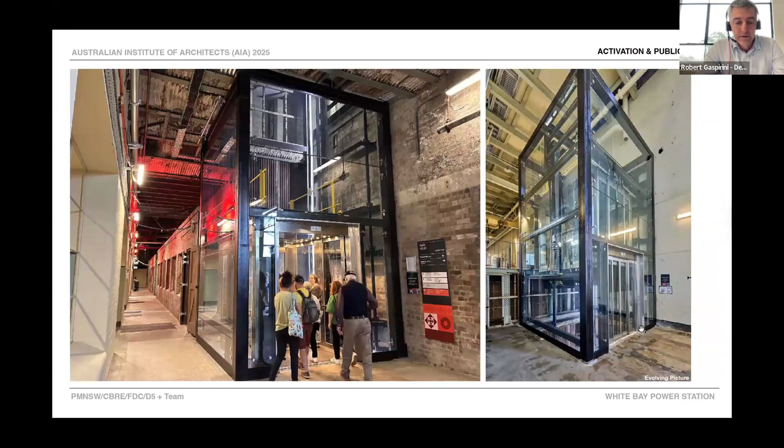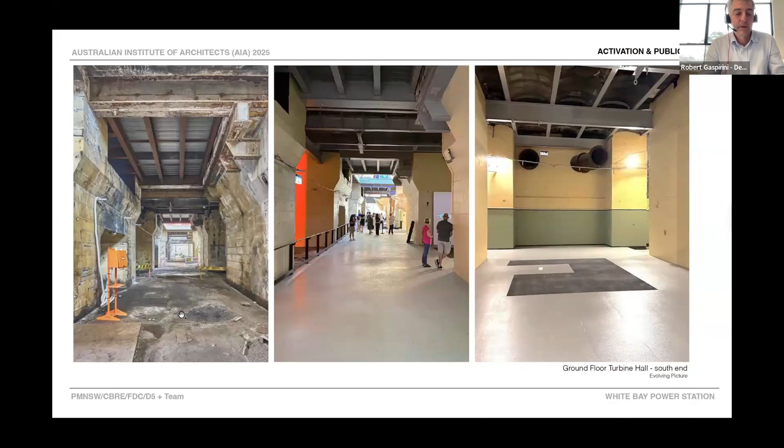Public area flooring is upgraded to BCA AS 1428, but not at the expense of erasing the evidence of use. The ground floor in the turbine hall was too damaged for repair. So this was one place where we had to sheet over the existing floor. Otherwise, we would have had a complete loss of the fabric. And this was done for about half of the turbine hall.

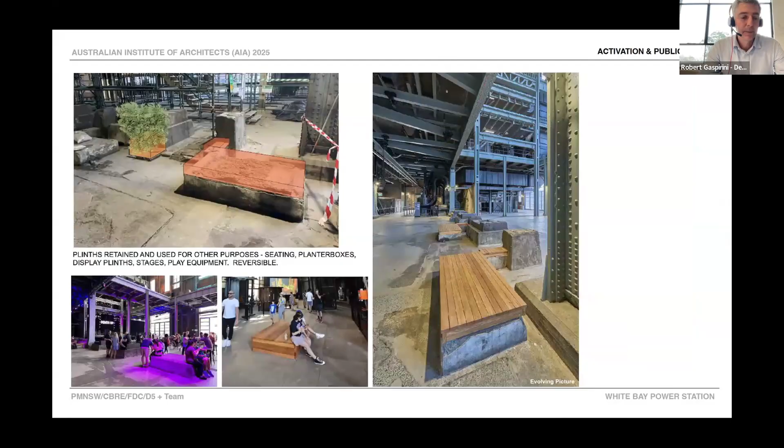Machinery plinths are pretty much everywhere throughout the complex. They presented a potential danger and trip hazards. Rather than demolish, we found innovative uses for retention. We created spaces that are a place for gathering and free to roam and to minimize barriers.

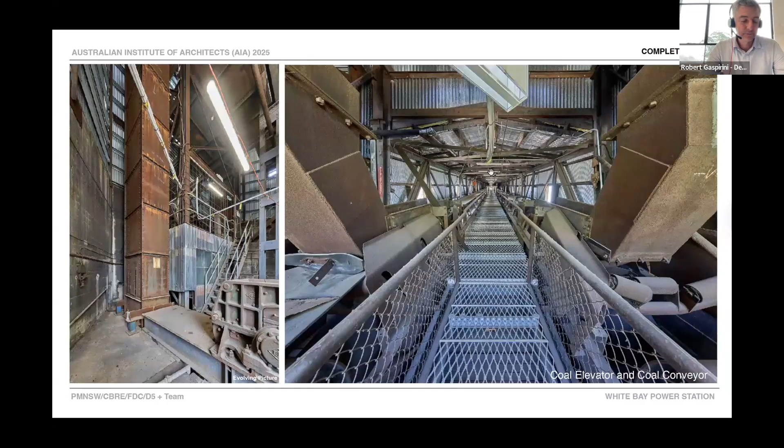And this was the incline conveyor within the coal handling shed. So the coal went up here and into the boiler house. This is the boiler house. So the coal would have dropped through to these hoppers and into the coal crushers. These are the coal crushers on the ground floor. And this is where the coal was crushed just before it was being blown into the furnaces, where it would create the steam. So every move was researched and every intervention was considered.

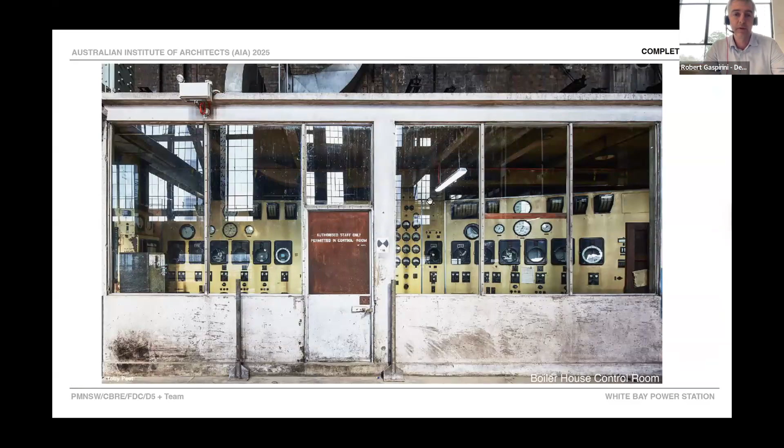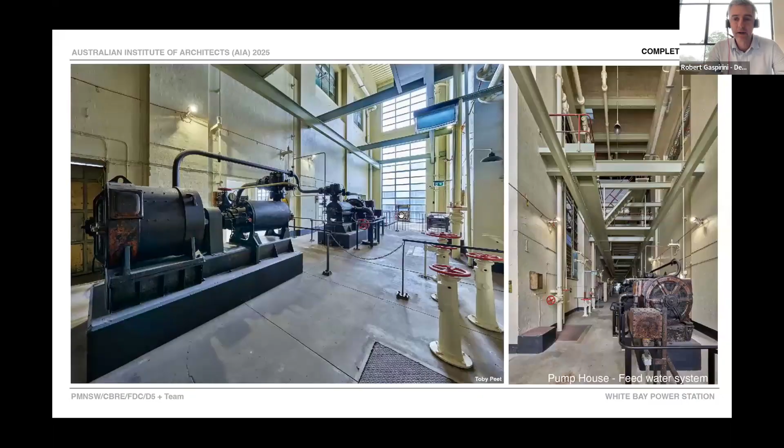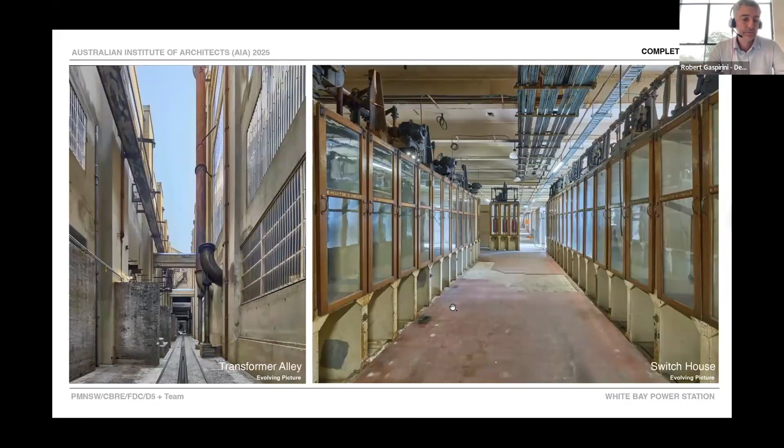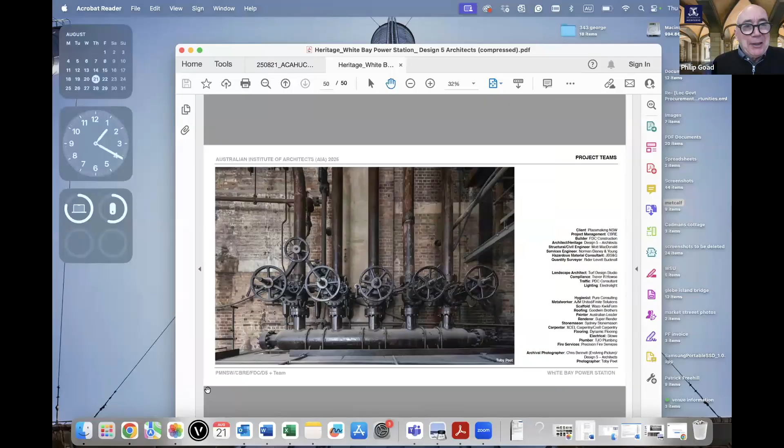Some questions have already appeared in the chat, and Paul Johnston has asked a question, Tina, about the Philip Smith Centre. Can you explain the decision to return the building to its original state and to remove elements that were part of the changing teaching curriculum during the life of the building as a teaching college, such as the theatre stage, which was used for drama and film, and the art room in the attic, especially given that these were much used and loved by the community?

Yes, I'm happy to answer that. I think part of the decision was really based on the university's brief as well, because in converting this to be a teaching facility, they needed everything to be a flat floor teaching space. And so in that instance, things like the stage couldn't reasonably be kept because of what they needed to use the space for. I think the main driver for removing interventions to restore the original progressivist principles is probably most strongly reflected with the verandas, because they'd been infilled with the fire stairs and toilets over time. And because we found an alternative solution for that, we were then able to open those areas up.